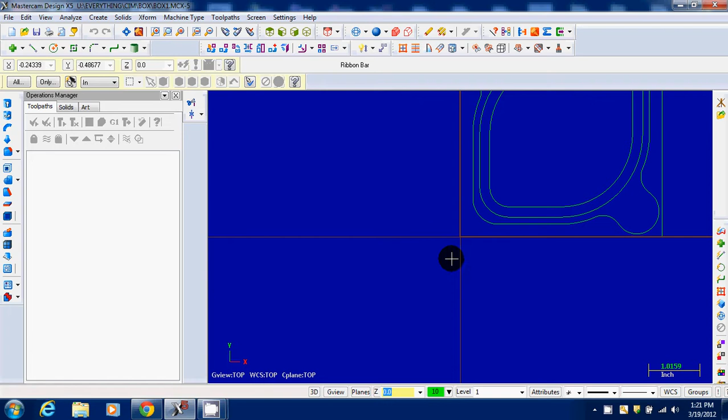Let's take a look at how to get started here in Mastercam. I've just opened the part. I've just hit F9 to get my red crosshairs in place. I'm going to hit the isometric view, and I'm going to come over here to fit. And that's what I'm looking at.

Next thing we want to do is get a machine listed in our operations manager. Machine type, mill, Haas 3X. That's what we've got to have. Next step,

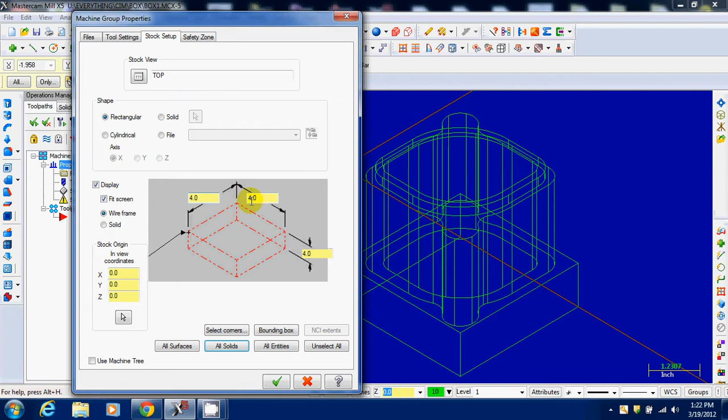head over to stock setup. Rectangular, display, fit, wireframe, point, all solids, the numbers change to 4, check mark. Now we have a dotted bounding box around our object.

Next step, Toolpaths, Tool Manager. Right click in here, create new tool. End mill, tool number 7, 7. We'll have to check the sheet. I'll do this as 3.

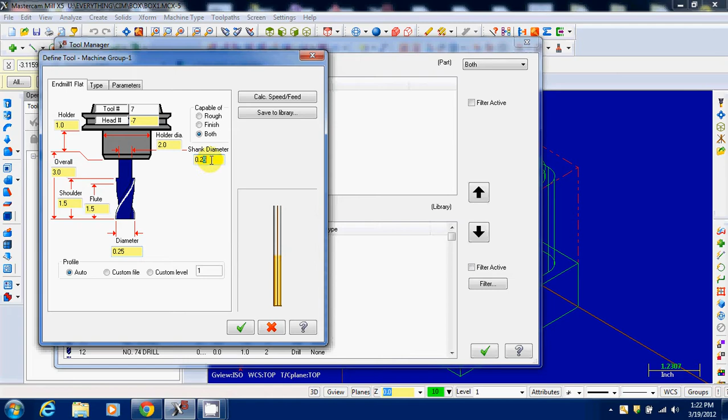This is 1.5. And this is 1.5. Diameter 0.25. Shank diameter 0.25. Check mark. Now we've got a tool waiting for us right there we just created. Check mark.

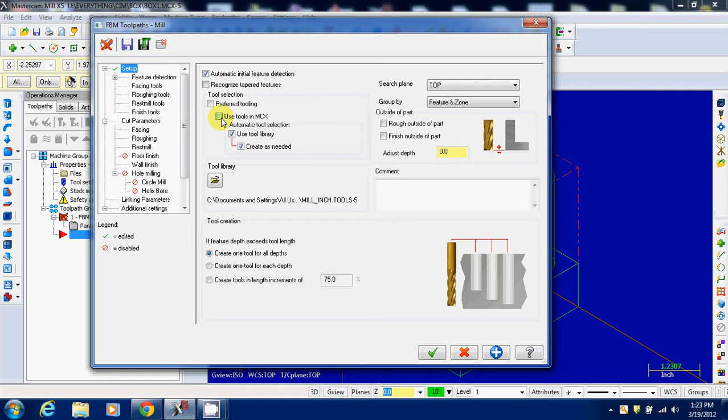Toolpaths, FBM mill, automatic, use tools, create as needed, unchecked. Check mark. Check mark.

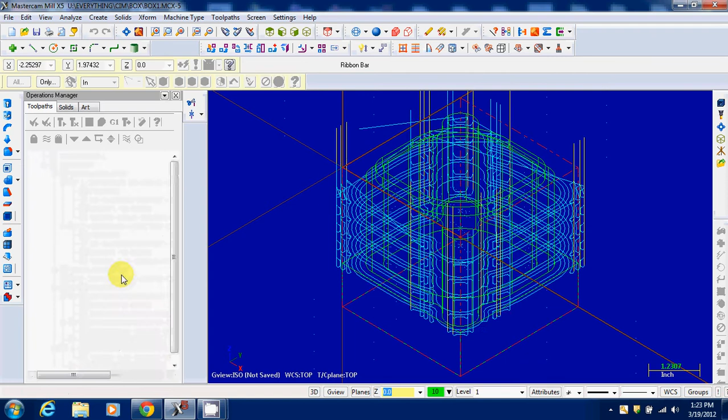And notice in the operations manager, it's a bunch of toolpaths being created, all using the 0.25 end mill. They're all the same. If for some reason one of these comes up as a 0.125 end mill or a 0.0625 end mill, we have to then delete those toolpaths. That's for an inside radius that you've made too small.

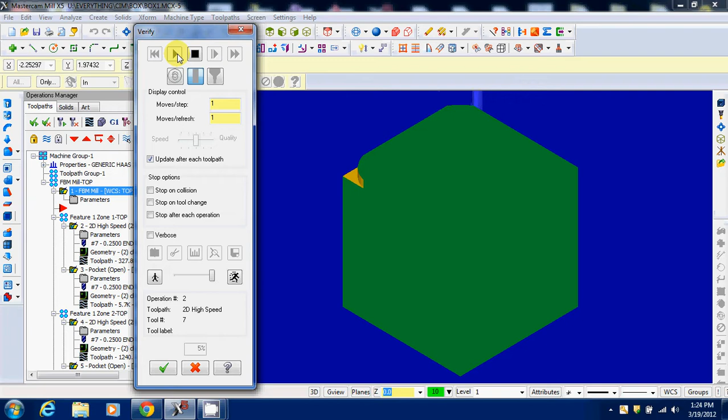Once that's done, green check mark, preview, play. Now we can watch to make sure everything looks right. There's no tool changes, same tool the whole time. It's knocking the corners off.

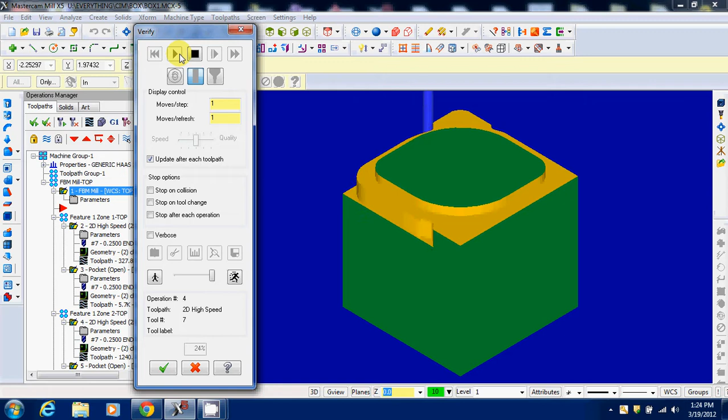Now it's going to do a profile. Continue to knock the corners off. Cut the profile again. And the last thing it's going to do is the pocket in the center. And I can notice that my profile is starting to show up and look correct.

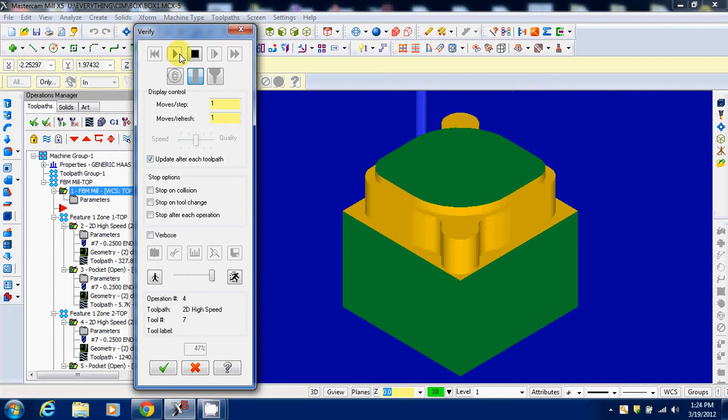It'll probably end up doing a skim pass at the very end again to ensure a nice finished surface. So if this is what you're seeing, you know that you're doing it correct.

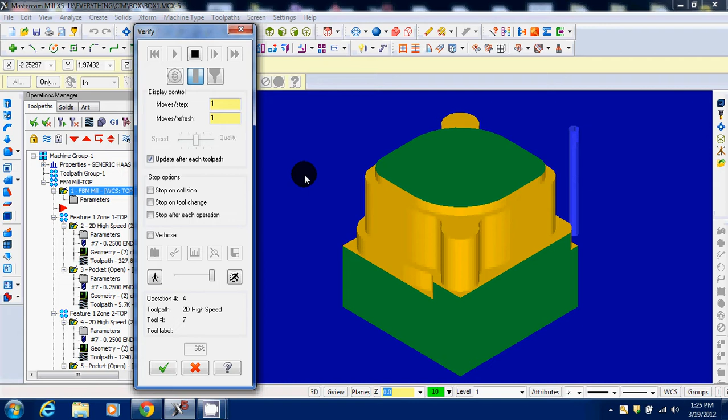The difference between doing this manually and using the FBM method, you're going to see here how much extra material is taken away in the corners, when some of this gets left behind when it only follows a profile. So this might be the last one, maybe one more, we'll see. Looks like one more.

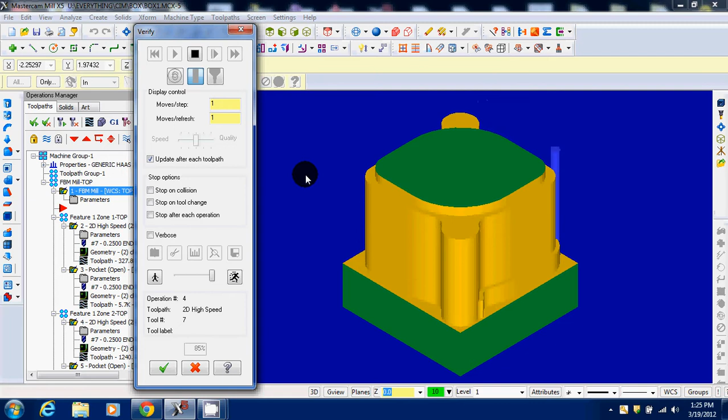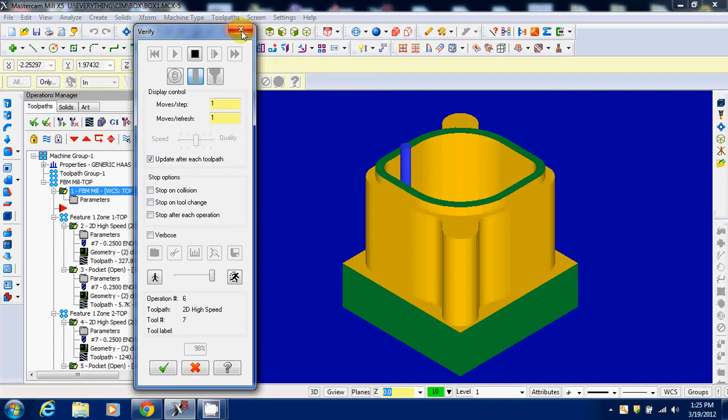Skim the outside, bore out the middle. Probably have 3 levels, 4 levels to get through to clean it out. And that's about it. Skimmed out the inside, it's finished.

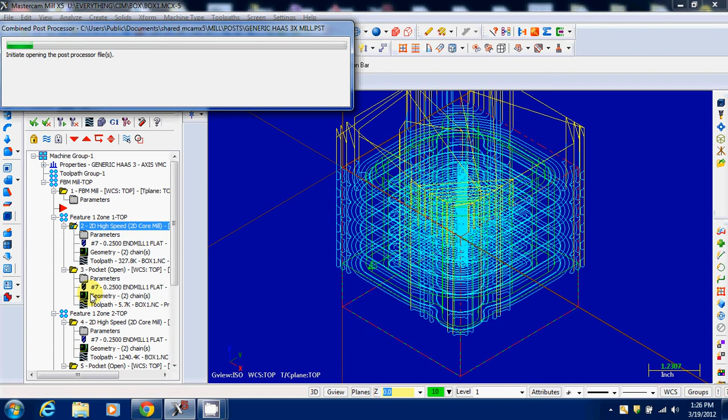Alright, once that's done, we can come over here to G1, NC, overwrite, edit should be checked, NCI file, overwrite, just leave it as is, check mark. We're going to get a new screen here that shows the G codes.

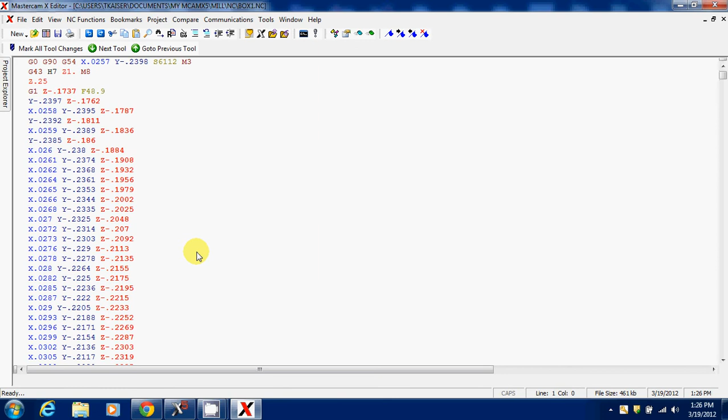Always check, as one of the first things, that your tools are correct. T7, H7. We know we've done this correct. And we can look at some final depths here. If you want to scroll through and look at your Z's, you can double check your final depths to make sure it's correct. Save this to your home drive and to your flash drive, and you should be done.

After this, you're going to flip over your object, and you're going to do the same process for the lid, and you have two separate NC files to work with.